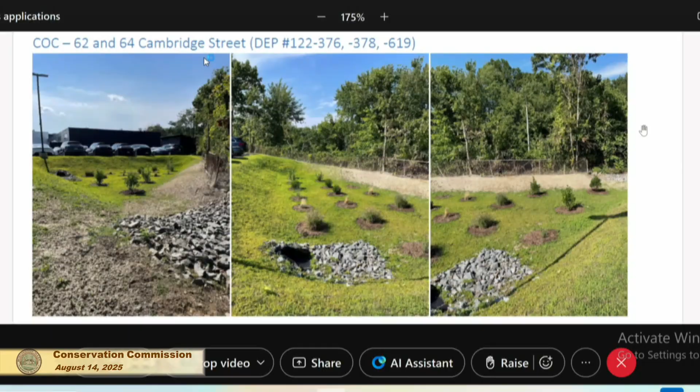There were some other minor changes up on top of the parking lot outside of the buffer zone. When we looked at the as-built plan and compared it to the approved plan over by Porsche, there was a row of parking that was flipped and mirrored as part of the Porsche project, which this board saw as part of the filing for Porsche. There was also some additional landscaping that we added to the Audi property when some trees were removed from the front of the previous Porsche auxiliary parking area.

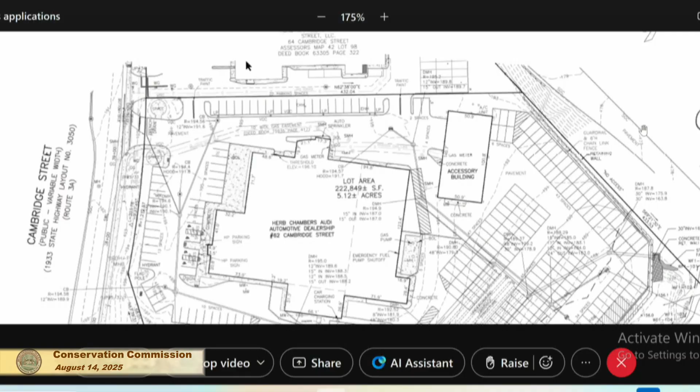And then there was a minor engineering change in 2022, which changed the shape of the front of the building a little bit, to get rid of a curved portion and make it a squared portion, for which we received a minor engineering change. So I think the biggest difference was that additional filling.

So we wanted to bring that to your attention, but it's a huge wetland down there, and I went down there myself because I wanted to check a few things that were requested in the order, and it is a huge wetland down there, and it's acting like one for sure.

It sounds like you're saying that although there was a few hundred extra square feet of filling, the replication area went up substantially. That's correct. Is that what you're saying? Yes. All right.

Eileen? Would you like to treat them all together and for Chris to go through the other two, or do you want to have a few words about this one first? Because either way, it doesn't matter to me. Well, you know what, he's presented about this. I'll just give a few words if that's okay.

Okay, this one was kind of the most complicated, the one he just described. So let's do the most complicated one. Well, I really have hardly any comments on the others. I just wanted to update the commission on one or two things. It was a bit complicated, it seems.

You were on the commission at that stage, Larry, but most of the rest of us weren't. So there were some ups and downs. He was there. Oh, I'm sorry, Indra, you were there too. It seems like there were some ups and downs. There were one or two erosion controls or violations that just took a little time to get sorted, but that all did get sorted.

There were to be 2 years of stormwater testing, and a protocol was submitted. I have one set of results from October 2024. I don't have 2 years' worth. However, if those October ones were all fine, I can see that there was probably a general agreement that maybe 2 years really just weren't necessary.

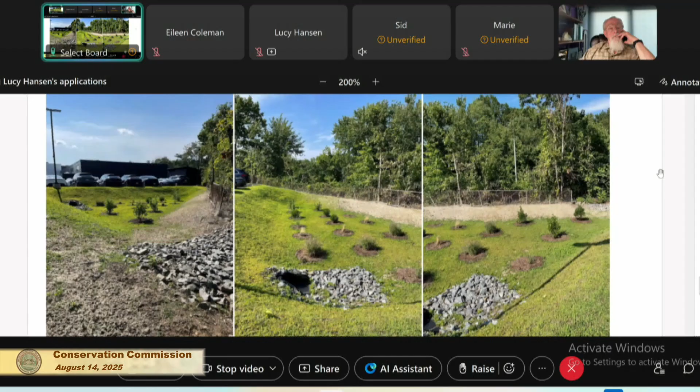They also hit us up for a full as-built of the ramp to help them map their MS4, which apparently they do from time to time. So we did an as-built, but when we did it, we found that the plantings did not survive in the rain garden.

After we realized that, we contacted the landscape contractor that takes care of the two properties today, and we instructed them to replant the rain garden. They actually extended a couple of irrigation heads out to that area to try to help keep those plants alive.

Other than that, the rest of the as-built conditions really were very close to the approved plan. We were really happy with the way that project came out. Thank you. Eileen, anything further on this one?

Another BVW project. It's a tiny bit ironic that they had to add irrigation to the rain garden, but okay, because it really doesn't get much water. I think that's the point. They've got pretty substantial stormwater management happening: 9 deep sump catch basins, a water quality unit, and 56 Cultec. The rain garden was bare when we saw it in June, but they've since added brand new plantings and some topsoil onto the lip where it was worn away. Same points as before, we just need to keep receiving inspection reports and not using rock salt. But I have no issues with this project.

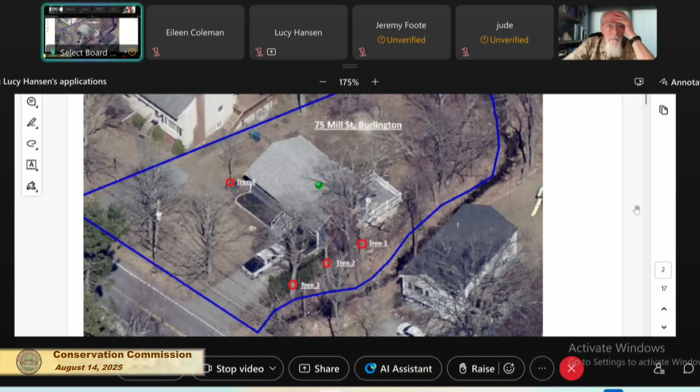I started this work originally because I was trying to get solar installed at my residence, but one of the feedback I got from some of the companies that did the assessment was the trees were giving a lot of shade. So I started looking into trimming or cutting them if there was a possibility. I had an arborist come by, and that's when I realized that the trees marked in red were potentially a danger or risk of falling in the future per the arborist. The tree number 4 that I've circled in my image is growing really close to my house, so there was a little worry of roots eventually getting too close to the foundation. So my application is to hopefully have you guys approve cutting down the 4 trees and replace them with native trees in and around my property. That's the summary of it. Very good summary, okay, thank you.

All right, Eileen or Lucy, comments please. This one's me because Sid and I have been exchanging emails, and I went out to look at the trees.

So 3 of the trees are on the stream bank, and they are in really quite poor shape. I think it is absolutely reasonable that they would come down. This is part of the reason why we brought it in front of you rather than just making this something administrative. One of them is a Dutch elm with Dutch elm disease, so we wanted to clearly state that the bark should be peeled off, as we found in a very recent filing, and disposed of.

In order to keep the bank stable, we should maintain stumps or snags. I wasn't sure about the volunteer maple beside the house. It's in okay shape, nothing really wrong with it except for that pestilence, a fungus, that Larry noted. But it's not a preferred tree, it's considered invasive. So I wouldn't be opposed to removing it and replacing it with native trees. They're definitely open to native trees, they had some suggestions, and they're open to feedback on alternative options.

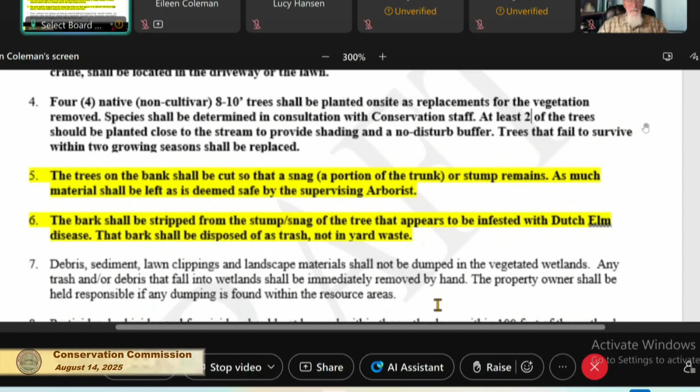Don't dump sediment, debris, or lawn clippings into the wetlands or stream. Pesticides, herbicides, fungicides should not be used within 100 feet of the wetlands or stream unless approved by the commission. Members of the commission or staff may just check on the tree cutting as it's happening, basically.

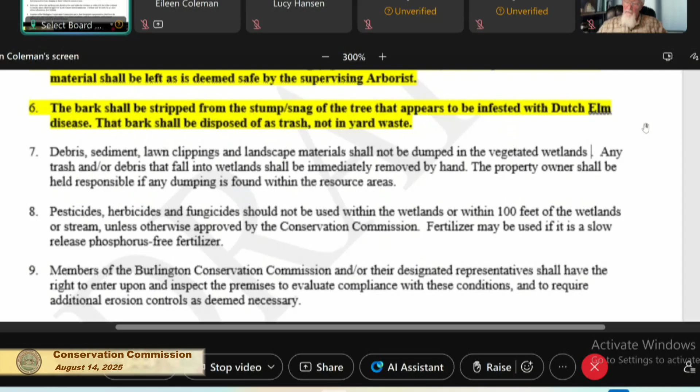All right, Bill, you have anything further on this? No, I do not. Anyone on the commission have anything further? Sid, anyone? No. All right, could I have a motion to issue a negative conditional determination, as it was stated, for the project at 75 Mill Street under Burlington Bylaw Article 14 and the State Wetlands Protection Act?

Is there a motion? So moved. Second? Second. Ed, how do you vote? Yes. Rob? Yes. Sarah? Yes. Indra? Yes. Bill? Yes. And I vote yes. That one passes, you're all set.

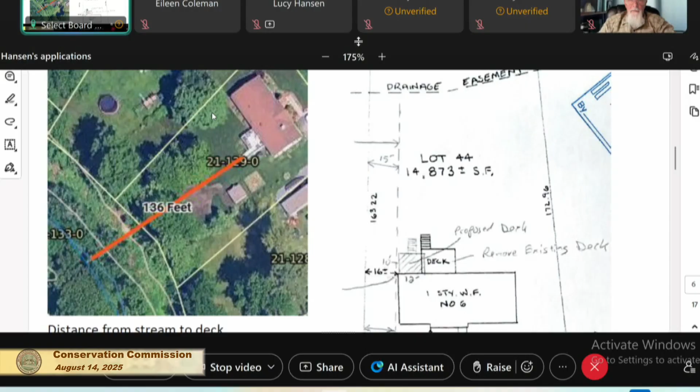Very straightforward. Eileen, any concerns over this one, or Lucy? This one came in front of us because I get a lot of building permits and I do a quick desktop analysis. So I sent a message saying you will need a permit for this through conservation, as it is roughly 136 feet away from a regulatory stream. What's funny is we got out on site and realized there is a big berm between your house and the stream. So it's still within the regulatory area, but in this case we are not super concerned about erosion controls, as we do not feel the sediment will flow over the berm. I think it might be okay.

Okay, thanks. Bill, any comment on this one? You're muted, Bill. There we go, I have no comment on this. Sid, anything? Indra? So I understand the existing deck, the new deck would be smaller. Yes, yes. And Sarah? No concerns. And Rob? Nope. And Ed? I have no further concerns.

Anybody in the audience have anything on this? This is 6 Sewell Street? No? Then do we have a draft document to take a quick look at? Yes, and he did get a copy of this, is that right? Yes, I did get a copy earlier.

Did you get a copy of this? Yes, Eileen. Okay, this is a really straightforward permit with not a whole lot in it, which is lovely for you and for us. It specifies that this permits the removal of a 16 by 16 foot deck and the construction of a new 12 by 10 foot deck, approximately 136 feet from a stream regulated under the local bylaw. It is within the 200 foot riverfront area. The commission votes to issue a negative determination.

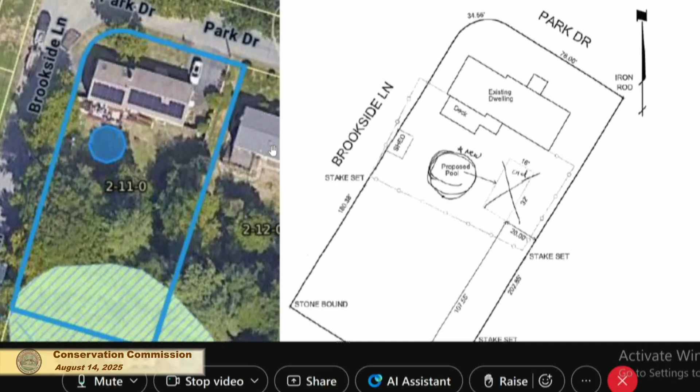Thank you. Amber Haynes and Joyce Haynes, we both live at 26 Park Drive in Burlington. And we put in a request to do an above-ground pool, 24-foot, and we installed the pool, and you saw that yesterday. Okay, so the record should show that this is an application after the fact. The project was installed, and they hadn't really come before us for the actual permit, so this is an after-the-fact filing.

Eileen, would you like to comment? It's actually Lucy's one. Lucy, would you like to comment on this one? This pool is within, I think I said 60 feet from the BVW and about 150 feet from a regulatory stream. That's kind of up in the air based on... it's very likely closer to the BVW, might be closer to the BVW based on some of our other maps that we found. This was just some desktop analysis that I might have gotten the numbers wrong on, but either way, it is within a couple of our regulatory areas, which puts this project in front of us here today.

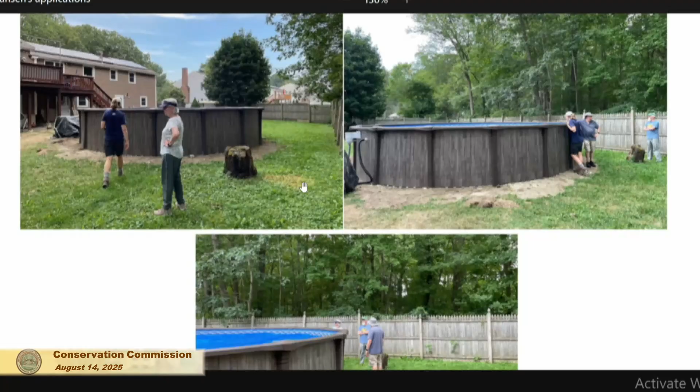We did find out yesterday on the site visit that the pool is already in place, which does make the visualization a lot easier for where it's going to go. Now we know exactly how close to the fence it's going to go. But that is most of what I had to say. The only other thought I had was this was put in under an RDA because there was a historical filing for an adjacent property that also had an above-ground pool at one point in history that was filed under an RDA within a similar or closer distance to the wetland and stream. So that's where I'm at.

Do you far have any concerns regarding what you saw out there? No large concerns. My only question is regarding whether or not the commission had opinions on the lawn clippings. Well, we will find out, won't we? Yes, and that was what I was going to raise, and that's all.

All right, so let's go around and see if people have comments on this one. Bill, we'll start with you. No, the pool looks fine, it's a big above-ground pool, it's impressive. And I don't have any other comments. All right, Ed? Nothing new. Rob? Nope. Sarah? No. Indra? Nope. Sadie? No. All right, let's talk about the wetland behind.

I noticed sand and clumps, piles of stuff, and actually, you're not supposed to do that. Okay, so we'll definitely have all of that removed. We actually don't go back there very often. Right, so we will be more vigilant of that and get all of that removed. So if we put that in writing, you don't have an issue with it because you just volunteered to do it? Yes, I will. Okay, good, ASAP. Excellent, that works. All right.

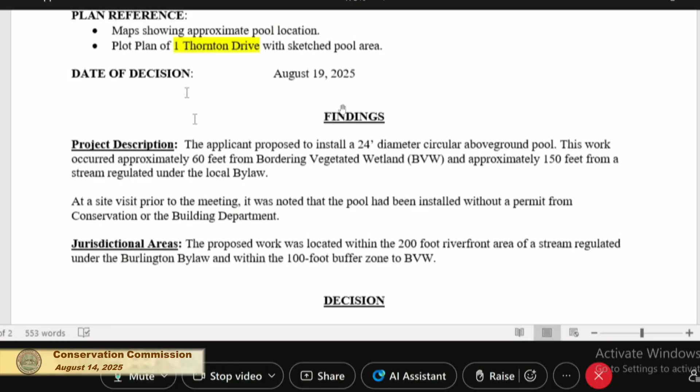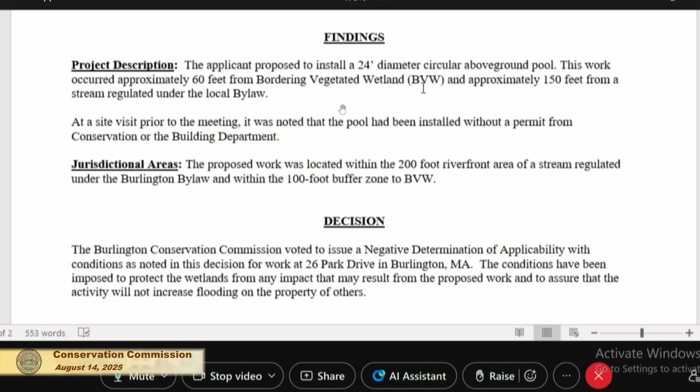This describes the installation of a 24-foot diameter circular above-ground pool. This work occurred approximately 60 feet from a bordering vegetated wetland and 150 feet from a stream regulated under the local bylaw. There was a note put in that this pool was installed without a permit.

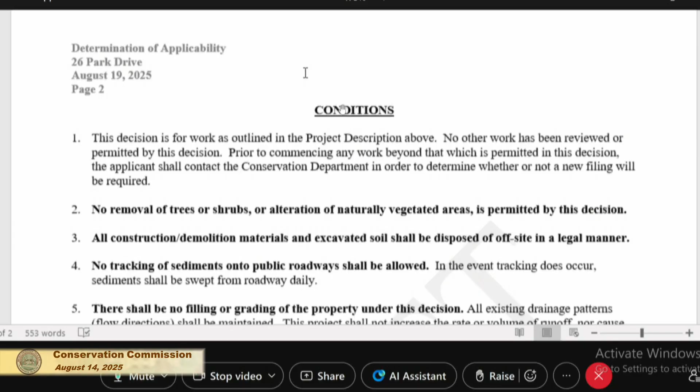Let's see if I scroll down. Much like before, this decision is for work as outlined in the project description above. Anything else will need a different permit. No removal of trees or shrubs or alteration of naturally vegetated areas is permitted by this decision. All construction and demo materials and excavated soil shall be disposed of off-site in a legal manner.

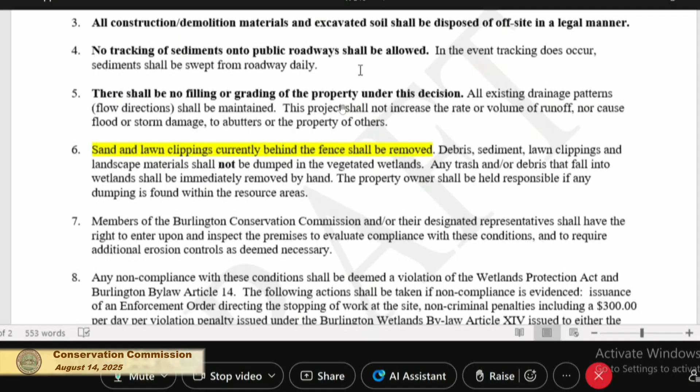As far as I'm concerned, the site looked decently set up for success. The grass will regrow, it's all good, so you should be good there. No tracking of sediments onto public roadways shall be allowed. We didn't see that, you're all set. There should be no filling or grading of property under this decision. There wasn't any, do not proceed to do any more.

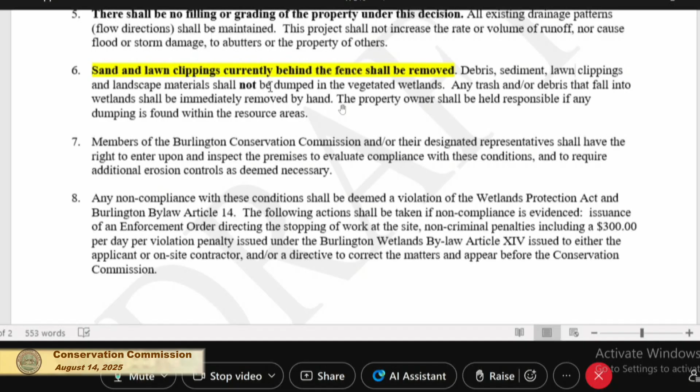This says that sand and lawn clippings currently behind the fence shall be removed. In addition, debris, sediment, lawn clippings and landscape materials should not be dumped in vegetated wetlands. Any trash or debris that falls into the wetlands shall be immediately removed by hand, and you are responsible for doing that. This again is the stipulation that we can check out the project as it goes on. I will tell you right here, the project has happened, so we will probably not need to come check it out beyond eventually a drive-by to see that the lawn clippings and sand have been removed. In which case, that would be great. But other than that, that is all we have here.

All right, I heard every word, it was fine. Every single word, yeah, I just adjusted the fan, it's so hot in here. The fan was down the hall doing almost nothing, so if we can stand the noise. I thought it might just send some into the open doors. I put the door partially closed to block most of the noise. We'll see, okay, it's nice ambient noise.

All right, do you have any questions at all? No, I think I'm good. Thank you guys so much, I appreciate it. And that was my first mistake as a newer homeowner. It probably won't be your last mistake.

Okay, so I think you're all set. Enjoy the pool. You have to vote. Did you vote? What? Oh, we didn't vote.

Sorry. All right, did anybody have any comments on the proposed draft? No. Okay, could I have a motion to issue a negative conditional determination for the project at 26 Park Drive? Second? Second. Ed, how do you vote? Yes. Rob? Yes. Sarah? Yes. Indra? Yes. And we'll go to Bill. Yes. And I vote yes, so we have a 6-0 vote.

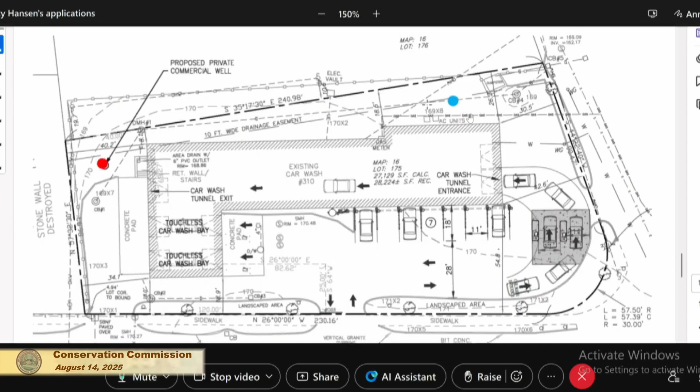And then there's possible hydric connectivity, looks like a little bit across the street. I'm not sure if they're related. I looked at a subsurface hydric connectivity table in Mass Mapper, and it sort of lists this particular area and a little bit of the portion across the street, near the Presbyterian church, as having a high flow rate, subsurface flow rate there.

So that's sort of understanding a little better how the water absorption—the level of the water in the well relates to the groundwater, is what you're saying? Yeah. Okay.

And then one more thing too, at least with the proximity of the well to the property lines—if this is an RDA, we don't have an abutter notification directly as we would in an NOI. That's true as well, right? Yes, but I'm not too sure, since I haven't really had much experience with well drilling, but possibly how that might impact the resource area in the abutting property.

All right, Sarah. I have several questions, and they don't really fit in a theme, just information gathering at this point. That particular location has been a car wash before it was Prestige. Our family used to go to it when it was named Rebecca and Teresa, the 2 bays, and enjoyed riding through it. Why now? It's operated as a car wash for years—why is there an urgency to get a well now? My immediate suspicion is you want to get something for free that you used to pay for. Maybe you can help me flesh out that idea.

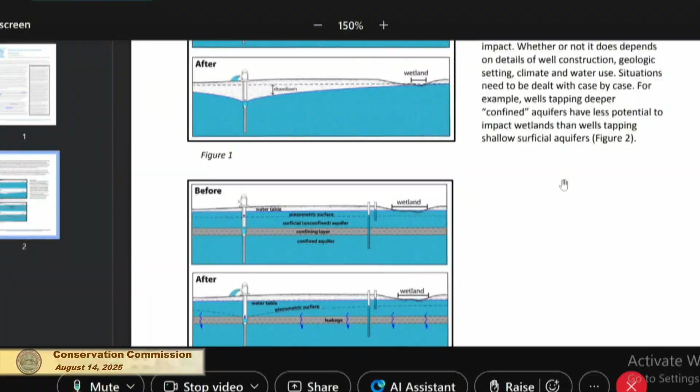They also sent me this, which we didn't talk about, but it's basically saying what you said. It's possible there could be a cone of depression that affects it, but we just don't know for sure. It could be that there's a confining layer that means it's not affected, or not immediately anyway. So it doesn't mean a well 75 feet from the wetland automatically causes harm, but the potential for harm can't be ruled out until we know more information.

I'm also more concerned that their ideal well location is only 25 feet away, and that's really quite close. So we would feel comfortable if we hear from an expert.

I'm looking for a decision by the commission on how they feel. We can issue a positive determination instead of a negative one, meaning there are enough open questions that they should go to a notice of intent. That's all it means.

I think we should have input from the Board of Health, and I assume, Eileen, you'll have a conversation with the appropriate staff over there about this? Yep, we will be.

The other thing is the Ipswich River Watershed Association, because the Ipswich River is one of the most endangered watersheds due to substantial withdrawal more than the stream can hold. The question is whether this could be a detriment to the Ipswich River and its watershed. Having said that, we're at the fringe, at the headwaters, where very small streams only contribute. We're not in the middle of it, we're right at the beginning where little streams contribute to the watershed.

The amount of surface area, land area that Burlington contributes is relatively small, since most of our land mass in Burlington is from the Shawsheen River watershed, which is different. So I don't know the answer to that, but that point has to be considered as well. My reaction is it probably isn't too significant, but I just don't know.

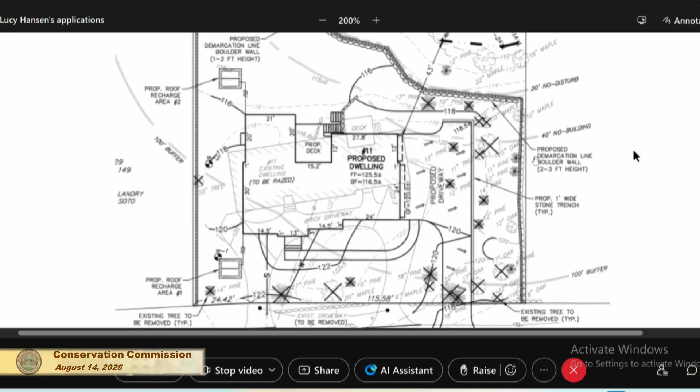I see that one. It's definitely outside the driveway, it's really intersecting the 40-foot no-build line. I think with some creative attempts, you could save that tree. Okay, let's list that. Let's go around, and then we'll just go through it all. Yep, not a problem. All right, Indra, what do you think? I don't have anything right now. All right, and Sid, anything? How about Bill? You have anything?

Yeah, I would definitely endorse what was just said about the 25-inch tree. Our general performance standards for the wetland regulation say, and I quote, 'Vegetation, particularly mature trees, shall be preserved to the maximum extent possible.' So I think it is possible to save that tree. A lot of the smaller pines obviously are very close to the construction site. I would like to see as many of the large hardwood trees preserved as possible, but that one in particular is a very large, very healthy hardwood tree that deserves to stay.

All right, one other comment I have is the driveway drainage. The way I'm looking at it, the bulk of the driveway away from the street will flow to the side and then to the rear, so I'm not concerned about that because it goes from the 120 line back to 118 at the rear. But from that 120 gradient line to the street, even though it's pitched to the side, the bulk of that water is still going to end up in the street. So I would prefer to see a trench drain at the bottom of that driveway than draining off to a recharge area.

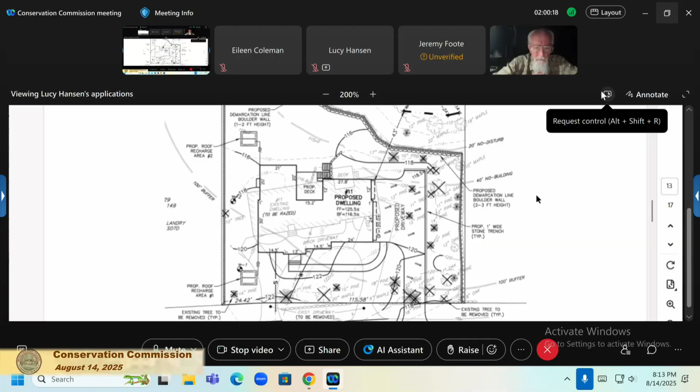Well, I don't think he was talking about a swale. I think he was talking about a graded trench drain just at the bottom that would infiltrate. Right at the wall area? No, right at the foot of the driveway. At the street? Clarify, what wall are you talking about? Yeah, I'm not allowed, from engineering, to install on the town property. Well, what wall are you talking about? I'm just not getting it. There's a real small boulder wall right at the property line between the street and my property. So where I have the proposed driveway, there's a boulder wall, but it is there.

Maybe it could easily be moved 10 feet up. A trench drain could definitely be 10 feet up the driveway, if I put it on the property. We're talking a very small amount of water, a very small amount of driveway that will be heading towards the street. It's 10 feet wide, or 13 feet wide, by approximately 20 feet.

No, I see exactly what Jonathan said. So it's not a very large area of water that you're trying to collect. And I will be able to get, due to the fact that it's not a very steep slope, I'm pretty confident that I can get that water to go into the stone trench on the side.

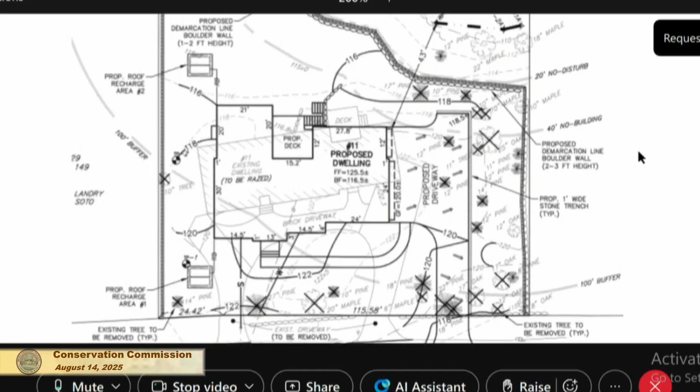I see. Okay, the amount that flows is a function of the pitch to the street and the pitch to the side. If there's not much of a pitch to the street and an equal pitch to the side, then 50% will go into the street and 50% will go to the side. So if you assure me that it's not that significant, I'll go along with you. So I guess we're talking about something like an 11 by 30 area? Correct, that's all it is in this area, the lower half, the small part of the driveway.

He thinks he's confident he can pitch it to go to the side. I fully accept that the whole upper part is going nowhere near the street, it's just the lower part, like Bill said, it's just a function of slope. So does that sound all right to you, Bill? I just wanted to make sure it was considered and designed to capture as much as possible.

And there'll be either some note on the plan or some kind of spot grading that will guarantee it's constructed that way, to go into the stone trench, correct? The stone trench proposed on the right side of the driveway, not the driveway trench. Yes, I'm very confident I can get that into the stone trench. I think you make a good point that it's a relatively small fraction of the driveway.

Correct. And just to note, if you look at the street, the amount of slope that is on it - right at the up gradient side it's at a grade of 118, and down on the other side of the driveway it's at 116. So that's probably 18 inches of slope just on the driveway entrance, so naturally it's going to have a lot of slope going towards that stone trench to begin with. Jonathan, I agree with you, you make a good point.

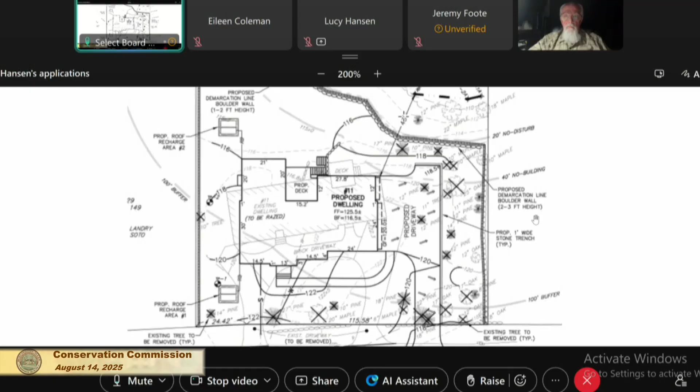Also, there's going to be some grading. What slope? The slope that goes back, that big hill - can you just point on the map? Like around here, or over here - where these trees are, it slopes down significantly here. It's weird. Are you mostly asking a question? I'm kind of lost if you're asking for something specific.

Can we just confirm that the trees being removed won't impact the slope stability heading down into the wetland? Okay, slope stability, okay. All right, but there's two pines, a 17-inch and a 10-inch pine, being removed.

As you go, that's before the wall, and after the wall there's nothing being removed. The lowest thing on the plan is the 10-inch pine, but there's probably other smaller trees being taken out that might be holding things together. So the question is making sure things don't go crazy and run down the hill. Okay, I'll add a comment about possibly small trees destabilizing the slope if removed - tree removal in general, not just the two big ones.

Anything else from the commission? Is there anyone in the audience who wants to talk about 11 Lexington Street? Anyone online? That's when you start to get landslides, when you take off all the stuff. I think you have a short list to respond to - that's not a problem.

I did want to add one quick thing since Maureen didn't finish with the wetlands. I walked towards the back and it definitely goes uphill, up gradient, towards the rear of the property. I know it's not flagged, but this is definitely just like a depression for a wetland, so the grades did go up. I walked it too, and I don't necessarily disagree, but on the plan it's just not showing.

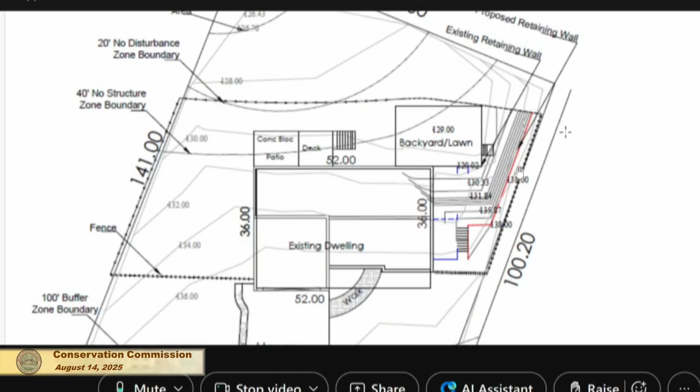There will be no actual building within 40 feet, but there will be removal of impervious surface, so there will be work within 40 feet. Since it was originally put in without a permit, we can now say remove it, because that's what he's applying for.

Okay, Bill, do you have anything else other than what Eileen addressed? No, it's just that to see the flow rates where the post was actually, even though slightly, greater than the pre is extremely unusual. But they make a comment in the second bullet saying that even though it's an increase, it's trivial, very minor, and still below the original pre-construction conditions. That would mean if the proposed design had been the original design, it would still be acceptable, and peak flow runoffs would show a decrease. I don't really understand that fully, but I think it's an improvement overall by far.

All right, so let's go to Sadie. Anything further? No. How about Indra? Anything further? No? Sarah, anything? Rob? I think I remember before when we were looking at the sport court.

I was just wondering if, for the drainage and the retaining walls, it could be somewhat directed towards the opposite rear corner, towards the resource area, and not sort of right towards the fence?

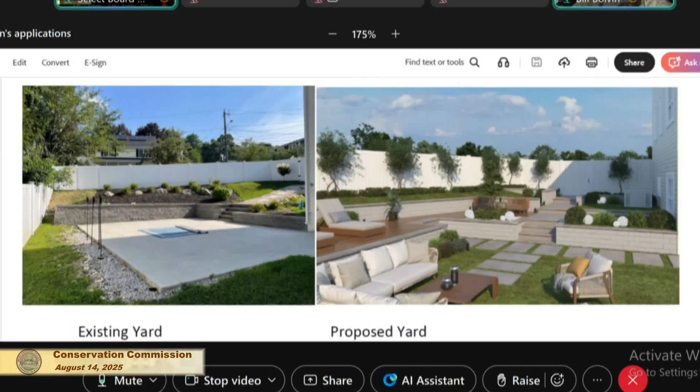Oh, are you saying the gap at the end of the wall? Yeah. I'm sorry, I didn't grasp what you were saying. Right, now I'm with you. I'd say that's not drawn to scale, but yeah, we'll definitely have the same exact gap, and if you guys want to put that in writing, we can definitely do that.

Flow towards—I see what you're saying. Okay, all right Ed, anything further on this one? No, I have nothing further.

This is a hearing. Is there anybody in the audience? There's nobody else in the room, so the answer is no. How about online? Is there anyone else online who would like to talk about 1 Elizabeth Ave? It's just us and Jeremy.

Nobody else. Guess not. So it's up to you, but given that it was a relatively small project and we felt pretty comfortable with it, and Oriel has been working with us closely, and they have a DEP number, we drafted decisions for this, so it's up to you.

I would like to suggest to the commission that we move forward. There doesn't seem to be big issues outstanding. Okay, if that's—I agree. All right, great, everyone seems to be nodding their head.

Normally every hearing requires two meetings of the commission, one to hear the issues, and then they resolve it, and then sometimes we can close on the next meeting. Well, we're making a special case for you to take care of it all at once. Awesome, thank you, appreciate it.

All right, I shall just fairly quickly go through the decisions. Okay, we're going to start with the bylaw as usual. Lucy will just make it a bit bigger in a second.

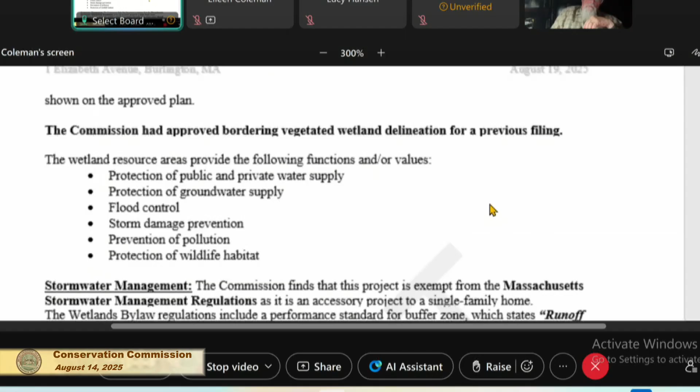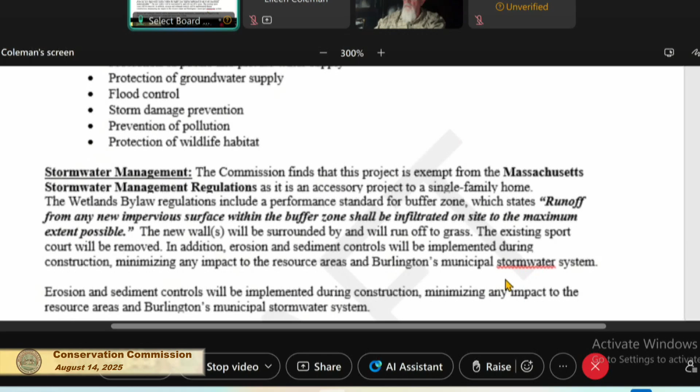The Commission finds that this project is exempt from the Mass Stormwater regulations as it's an accessory project to a single-family home, but the regulations do include a performance standard for buffer zone, which states that runoff from any new impervious surface shall be infiltrated on site to the maximum extent possible. The new walls will be surrounded by and will run off to grass. The existing sport court will be removed, and erosion controls will be implemented. This may serve as a permit under the Erosion and Sedimentation Control Bylaw.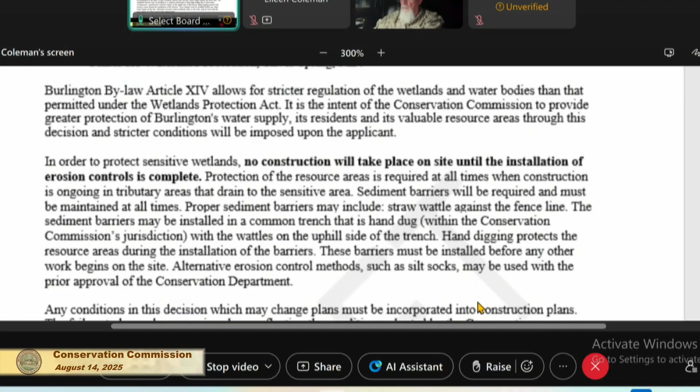I'm suggesting a $2,000 bond, but you might think that's not entirely necessary. I really don't know. Let me just open up the order, which I didn't have ready to go.

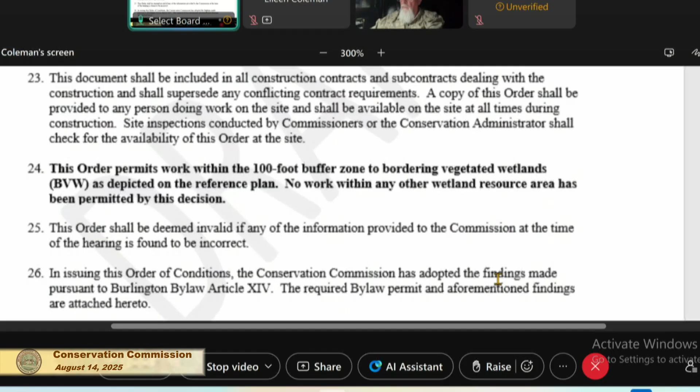Did it just switch over? It did. We're again referencing the same plan set. All of those first few conditions are completely standard. Uriel did get a copy earlier of this. The order permits work within the 100-foot buffer zone to bordering vegetated wetlands as depicted on the plan, the reference plan, and no other work within the wetland resource area has been permitted by this decision.

A lot of those first several conditions are just boilerplate. Then we get down to pre-construction conditions.

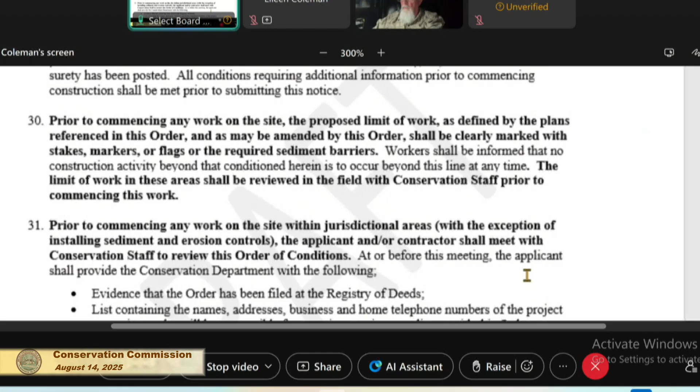You'll let us know a few days before you do the work that that's going to happen. At that time, we'll come out to see that the rest of the next few conditions are in place: evidence that the order has been filed at the Registry of Deeds, a DEP sign has to be up, and some erosion controls need to be put in place.

I think in this case, all that is required is some wattles along the bottom of the fence line, and I think that will be sufficient unless anybody disagrees with me.

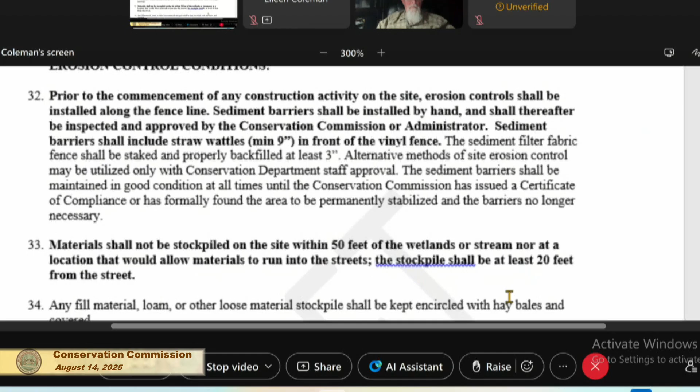Materials shall not be stockpiled on the site within 50 feet of the wetlands or a stream, and a stockpile should also be at least 20 feet from the street, so as to prevent it going into the street.

The rest is saying keep any loose material covered, no dewatering permitted unless you give us a dewatering plan. Keep the street clean. We reserve the right to require additional erosion control.

No additional filling or grading other than what's shown on the plan. Obviously, you are showing grading on the plan. Nothing other than that is allowed.

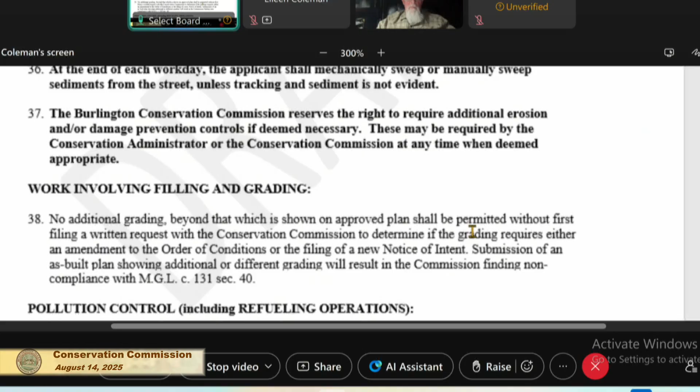Keep everything out of the wetlands. That's what the pollution control conditions are saying. And don't discharge anything, including fuel, towards them. Pesticides, herbicides, fungicides should not be used within 100 feet of wetlands.

And for buffer zone enhancement, they are proposing to plant 6 native trees and 17 native shrubs per the reference plans.

I'm actually not sure it was written on what you got, but Uriel, we have talked about species, right? Yes, he gave me a set. So you're okay with these numbers, 6 trees and, if I'm not mistaken, on the plan it's 5 trees and 17 shrubs?

5? Oh, I may have miscalculated. I could be mistaken, though. Well, let's just check it. So they had identified something like 4 or 5 species. I was happy with it being a mixture of any of those 4 or 5 species because they're all native and they all work for the area.

I'm just highlighting that so we can double check it. Can you just count the trees so that we're all on the same page? Yeah, I just counted it here. It's 5 trees and then 17 shrubs. I will fix it. 5. Okay.

And then request for certificate of compliance - this is just telling you how you go about closing out this whole thing to get it off your deed. Okay? Awesome, all right, thank you. You have any questions at all? No? Not today. A lot of standard conditions that everyone gets.

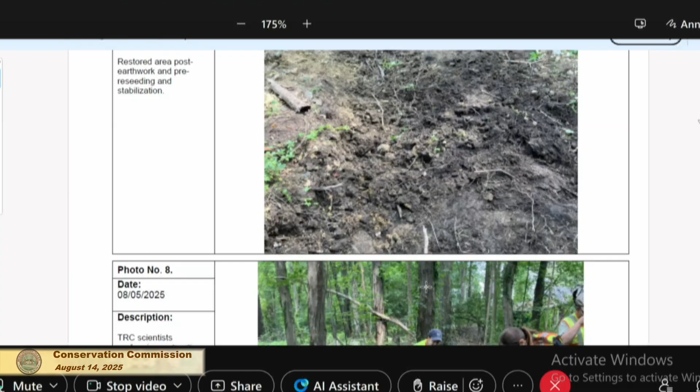Jeremy, I can't remember what I exactly said to you in writing the other day, because we talked about closing out the EO. But I think if by the time the next meeting comes around, we've gone out there and we're seeing that some of the seeds are starting to poke up through, then I think we'll be in a position to close the enforcement order. Do we close it?

And if it's not, what is the process in something like this? We would do a site visit to confirm that everything is looking pretty good, and then we would just send them a letter to formally close it out. If there's not really a form, it would.

We don't vote on closing it out, do we? Yeah, we would. We would vote. Okay, all right, just want to make sure.

So I think we'll just keep an eye on it. And if we can do it at the earliest meeting that we can, we will do so. And Jeremy, you may not need to be there at the meeting if we're happy with how it's looking. I'll let you know, okay? Absolutely, yeah, let me know.

All right, so I think we're all set, right? Yes. Jeremy, thank you very much. Oh, it's no problem, thank you very much. All right, have a wonderful evening. Appreciate your patience waiting all this time. Yeah, no worries, it is what it is.